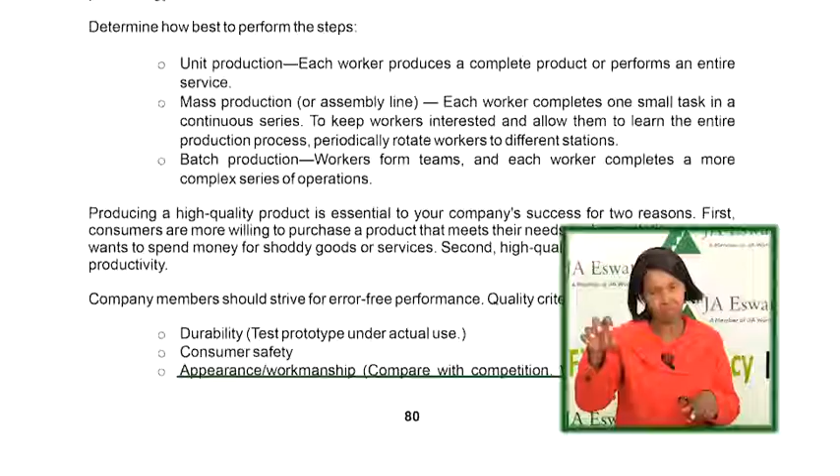Another way of ensuring high quality in your production: provide training for all members. All members must be aware and know how to produce this. If you're using an assembly line, each person must be very sure and have all the information of the task he or she must carry out in that line.

If we are producing a pen, I must know how to fit this, how to fill in the ink on the pipe. If we're producing polish, if I have to mix the wax with paraffin, what formula do I use to mix that?

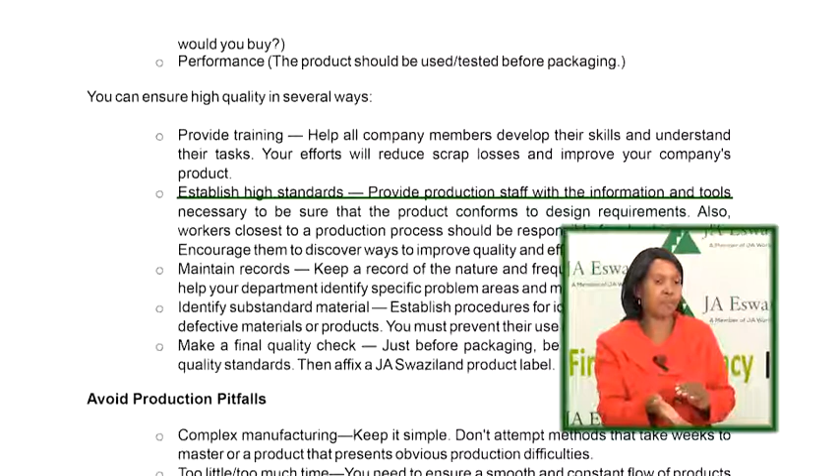Number two, to ensure high quality, establish high standards. Provide production staff with the information and tools necessary to be sure that the product conforms to design requirements.

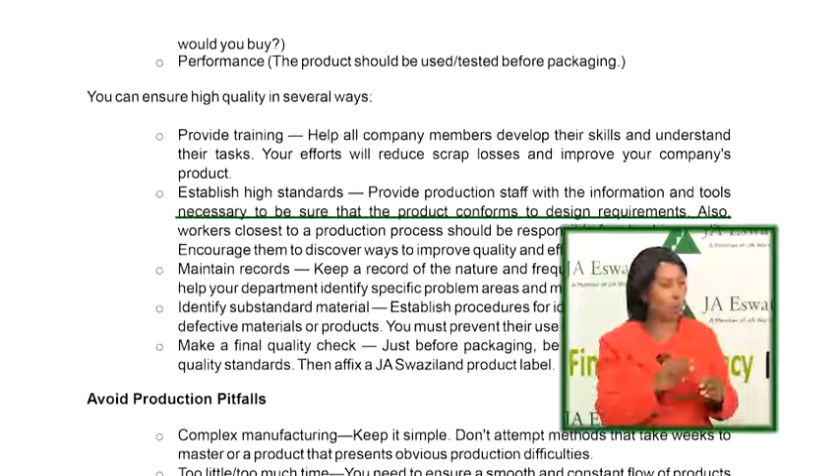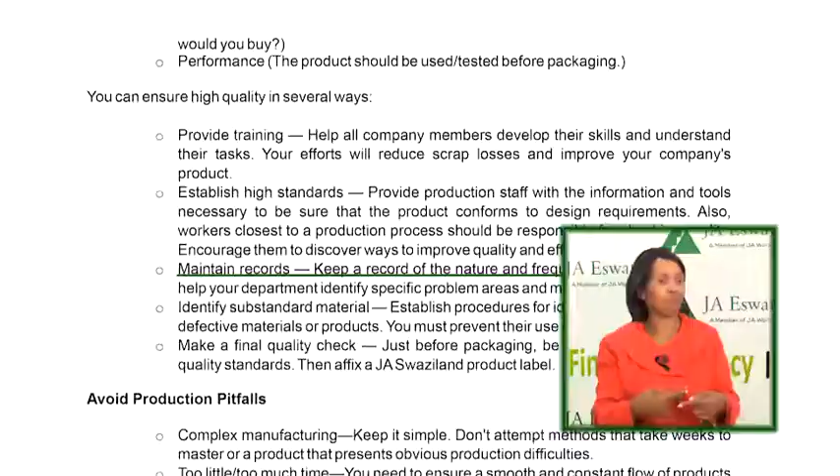Number three, maintain records. Keep a record of the nature and frequency of defects. This will help your production department identify specific problem areas and make needed corrections.

Number four, identify substandard material. It is not just any material you can use for your production. You should be able to identify substandard material that is going to lead you into producing something of very low standards.

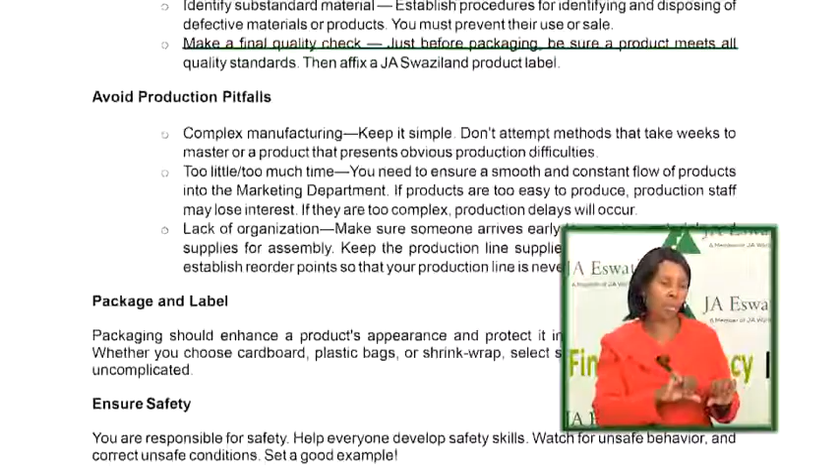The last thing, you should make a final check, which is the work of the sales and marketing manager and the quality controller. These people must ensure that just before packaging, the products meet all the standards that we have set as a company.

And lastly, avoid production pitfalls. That is to say, avoid complex manufacturing, which is to say, keep it simple. Don't attempt methods that take weeks and weeks to master a product.

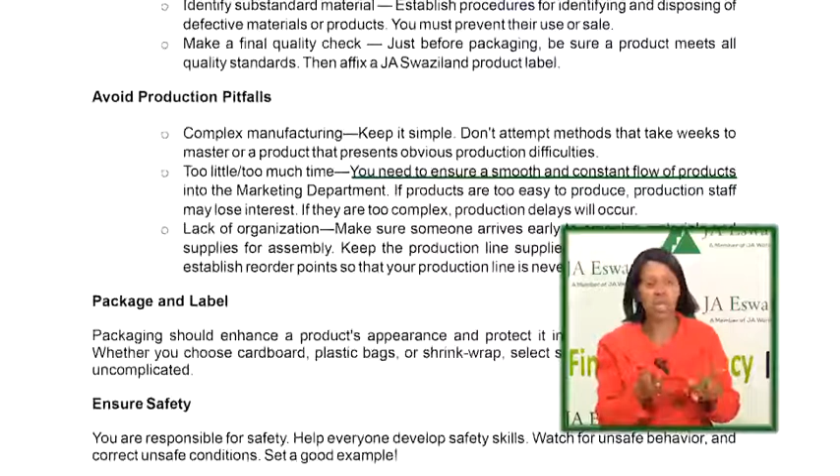Number two, you need to ensure a smooth and constant flow of products so that at the end you don't find yourself having a lot of customers who have ordered things and you cannot deliver.

Three, lack of organization. Make sure someone arrives early to organize materials and supplies for assembly. If you're using the assembly line, we mustn't all come to work at 8 if we've decided to start working at 8.

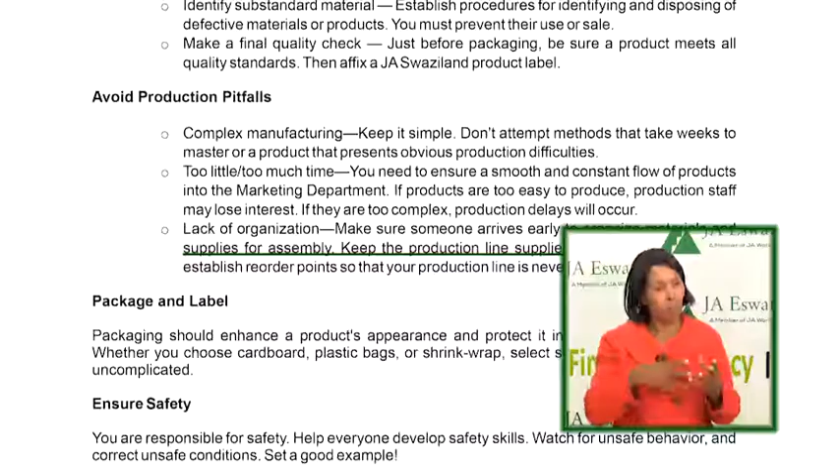No one has set up the assembly line, no one has prepared the material and equipment we need. We are still going to prepare ourselves, which can take even longer, which will make us not able to meet the demand if it is very high.

The last thing, you must make sure you package and label well. It is very, very key when it comes to production.

How your product looks like. Packaging should enhance a product's appearance. Whatever you're going to use for packaging, make sure it's material that is going to attract your customers or make them have an interest in what you have produced.

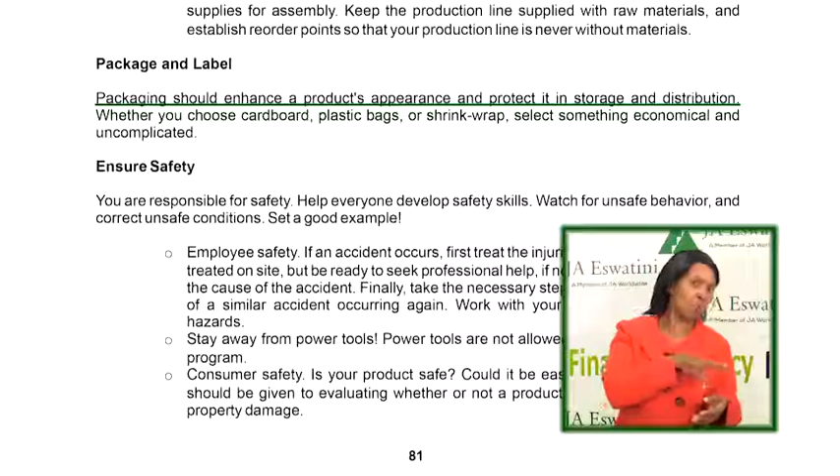That goes into what you have written on the stickers outside of your product. What information have you put there for the customers, for them to understand your product, how it is produced, and the benefits of your product.

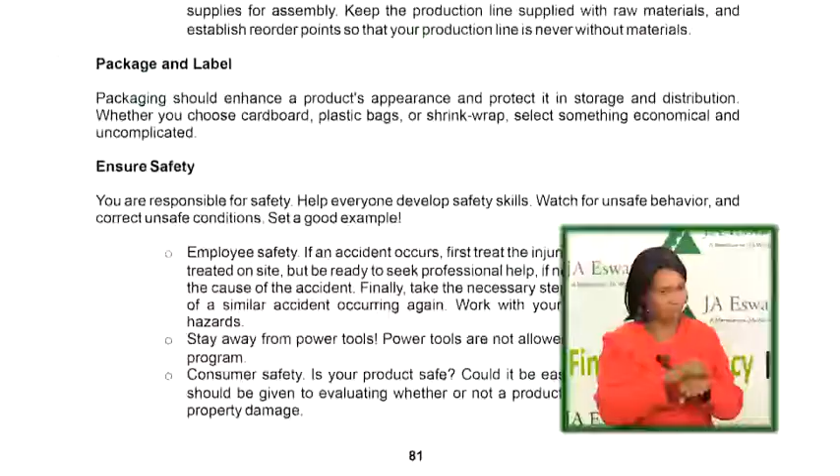Ensure safety. Let's say we are producing my favorite example, the floor polish. Some people are going to be making a fire. There is wax in there. The wax has paraffin and maybe some other ingredients that you need to make it enticing to the customers.